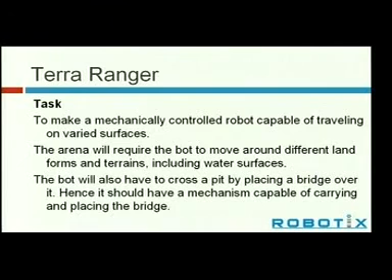Now coming to the first mechanical event, that is called Terra Ranger. In this event, the task is to make a mechanically controlled robot which is capable of traversing on various surfaces like undulating surfaces, sand, water, etc. In this event, the bot will also have to cross a pit by placing a bridge over it. So the robot should have a mechanism that should pick up a bridge, carry it and place it over the pit to cross it.

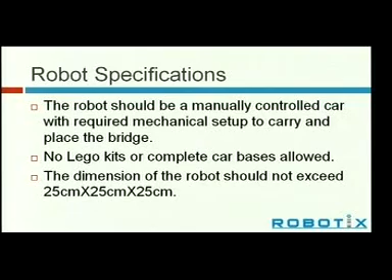Now if we come to robot specifications, the robot should be a manually controlled car with the required mechanical setup. No Lego kits or complete car bases are allowed, and the dimensions of the robot should not exceed 25 x 25 x 25 centimeter cube.

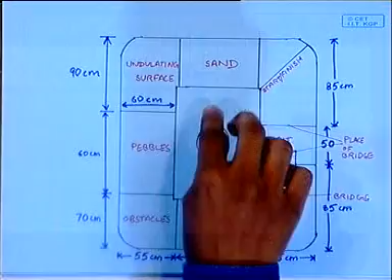Now coming to the arena, as you can see here, the arena is a wide closed track with different regions as marked. You can see here sand, undulating surface, pebbles, obstacles, water. Then a bridge is placed over here, and here is the pit. Here is the start finish line. The inside of the track will not be having any boundary walls.

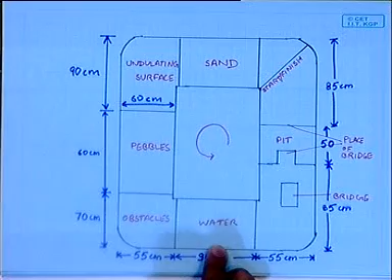Here the bridge will be having hooks attached to it so that the robot can pick it and drag it. The hooks and the weight details of the bridge will be notified very soon on our website. The maximum depth of water would be 20 centimeters. Now coming to the obstacles, the positions of the obstacles would be released just before the event, and the obstacles would be wooden blocks. The pit over here would be of depth 15 centimeters.

Now coming to the rules of the event, the robot has to start from this start line and it has to traverse in the counterclockwise direction. So it has to come to the sand, then undulating surface, pebbles, going through the obstacles in water. It has to come to the bridge, pick the bridge up, place it over the pit, cross it and reach the finish line. If the robot misses out any of these zones or is unable to complete any of these zones, it will stand disqualified.

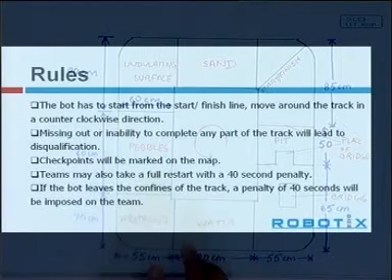There would be certain checkpoints at various places on the track. Now in case you want to restart with your race, you can take a restart, but that would cause you a penalty of 40 seconds. Also, if the bot leaves the confines of the track, a penalty of 40 seconds would be imposed.

A maximum of 2 restarts are allowed, and each time you take a restart, there would be a penalty of 40 seconds added to your time. If the bot is not able to place the bridge on the pit, it will be disqualified.

Coming to the next rule, only one robot per team will be allowed on the arena at any given instant of time. The maximum voltage that can be used for powering the bot is 20 volts DC. Arena specifications will remain the same for all the rounds, but in the higher rounds, the rules of traversing the arena may change. For example, you may have to go clockwise.

Now let us come to some basic issues that you will encounter while making a bot for this event Terra Ranger. Firstly, you have to make a drive that will enable your robot to traverse over terrains like undulating surfaces, sand, pebbles, water. So the drive that you make should be strong and efficient. A very simple drive that would give you these qualities is a differential drive, so you can go for a differential drive.

Now if you don't want to use any of these drives, we would really appreciate if you come up with some innovative ideas like a hovercraft or any such new mechanism. Again, special attention must be paid to the type of wheels that you use and the height of these wheels.

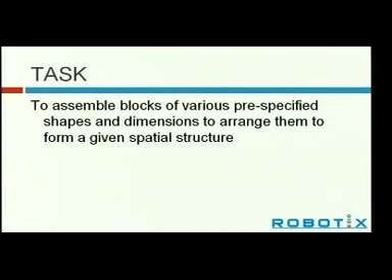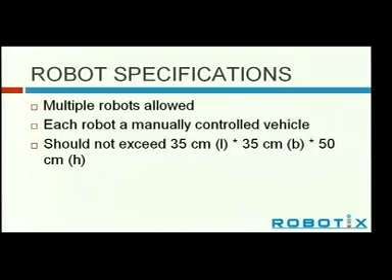Each robot should be a manually controlled vehicle and the overall dimension should not exceed 35 cross 35 cross 50 centimeters. Now what do we mean by that? By that we mean that initially when you start the event, the initial orientation in which your robots will be kept should not exceed this given dimension. And once your robots have been placed in that initial orientation, you cannot touch any of your robots.

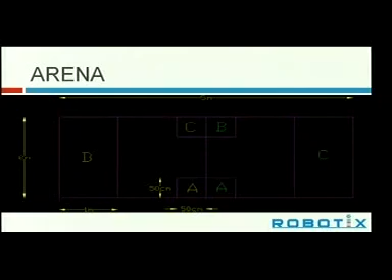Now coming to the arena, as you can see here, the arena is a 5 meter by 2 meter polished plywood base and it would be enclosed by a boundary wall of height 10 centimeters. It would be divided into 2 equal parts. Each part would have 3 zones, zone A, zone B and zone C.

Coming to the rules now, zone A is the place where your bots will start from. So you have to place your bots in that initial orientation here in zone A. Zone B is the area where the blocks would be placed, and the position of these blocks will be specified just before the commencement of the event. So you have to come from zone A to zone B, pick up those blocks and move to zone C.

Now zone C is the area where you have to place these blocks in the given structure. The structure would be specified. The structures for the first 3 rounds would be specified on our sites very soon. But just to give you an idea of what kind of buildings you have to make, say you have a cuboid.

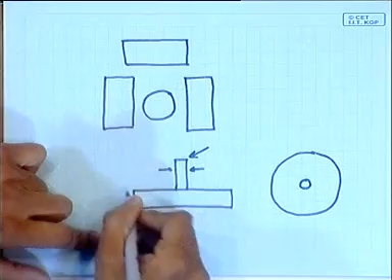So maybe we can ask you to lift this disc up and place this disc on the cuboids. So you can be asked to make any such kind of structure. Now coming back to rules, all the blocks would be numbered and each block would be associated with a certain number of points, and the points would be proportional to the difficulty that you would encounter to pick up that block. For example, picking up a cone would fetch you more points than picking up a cuboid.

Touching a block would disqualify the team immediately. So touching any block at any instant of time is not allowed. The maximum amount of time for the first, second and the third rounds is 4 minutes, 5 minutes and 10 minutes respectively.

Now here we have something for you. You can take timeouts if you want. Now when would you want to take timeouts? Maybe if you are going from zone B to zone C and the robot is holding a block and it drops that block and the robot is not able to pick that block again, so you can go for a timeout. Or maybe in zone C, suppose you have already placed block 1 and while placing block 2, block 1 falls, and now you are not able to place block 1 again in that orientation. So you can go for a timeout.

Here in this event, a timeout would not mean restarting the whole race again. You can take timeouts corresponding to certain blocks. For example, if block 1 falls, you can say block number 1 timeout. The time would be paused. Block number 1 would be placed in zone B in its initial position. The robot would start from where it stopped and the time would be started again. So you can take timeouts for one block, maybe more than one block. If you take timeout for more than one block, it would be counted as a single timeout. Number of timeouts in round 1, round 2 and round 3 are 1, 2 and 3 respectively. The rules for the next rounds would be disclosed at the time of the event.